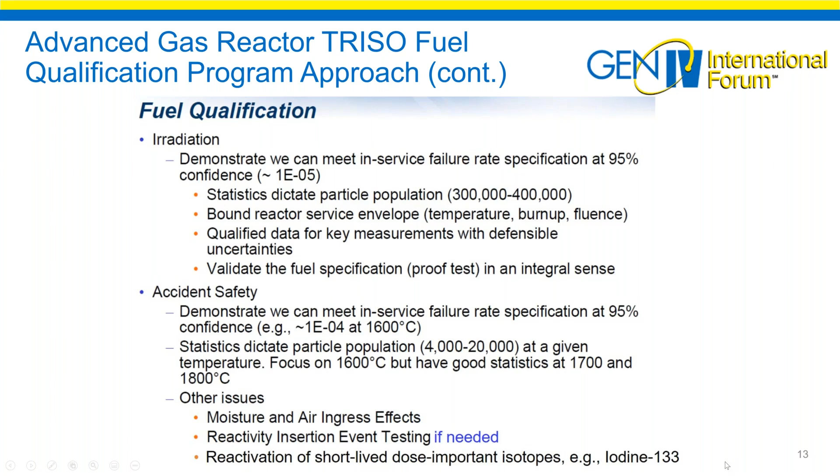Is interested in what the dose would be to the public. Let's look at the parts of our program. We have fuel fabrication, we irradiate the compacts, and then we do post-irradiation examination, or PIE, and then safety testing. Along with that, we have to look at the fission product source term, and how fission products are transported in the particle through the compact and the block. And we want to have modeling techniques.

I want to mention how this fuel is made. We take acid deficient uranyl nitrate and we basically do the mixture. We make it as a stoichiometric uranium oxycarbide, and we use a solution gel method, internal gelation. And what we do is we have a gelation column that has NH2OH basically in the column, and we use a needle and we make very small, tiny particles of, basically jellies of fuel.

We let them age in the column. We wash them with the same NH2OH. We dry, we calcine them, we reduce them, and then we sinter them. And of course, we look at what we have. We coat them in a chemical vapor deposition reactor. And we basically go through, we compact them, and then we sinter in a furnace again.

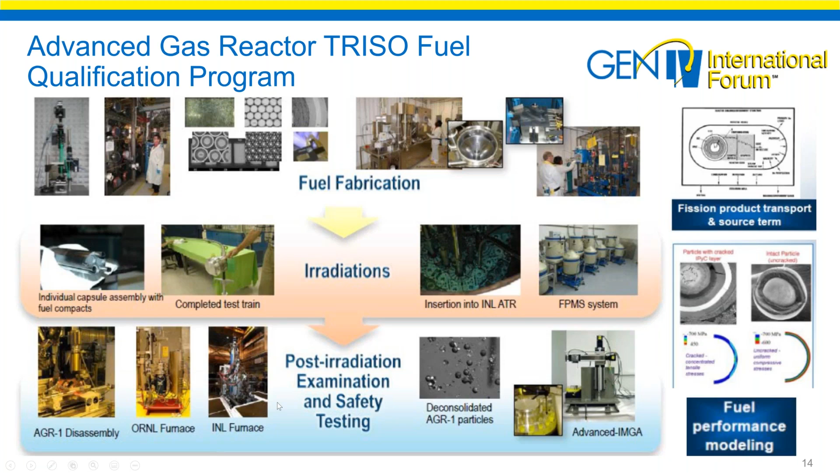Here's a timeline of our program. We started back in fiscal year 2004. AGR-1 was an early test of lab scale performance. It was meant as a shakedown of the capsule design. Now, we have 72 compacts in there. We didn't just have all the same thing. We had the German-like fuel, and then we actually made 3 variants, and we tested 2 of them. We used one coating with argon and the other at slightly different parameters with helium as a diluent.

Then in AGR-2, we had particles made at BWXT, and then we compacted them at Oak Ridge. And we have UO2 and UCO, and there were also French and South African particles in separate capsules.

We also made design-to-fail fuel in AGR-3/4, and that was used to look at fission product retention and how fission products moved in the graphite and the matrix. And we are currently irradiating what's known as AGR-5/6/7, where we have a qualification test of fuel totally made at BWXT.

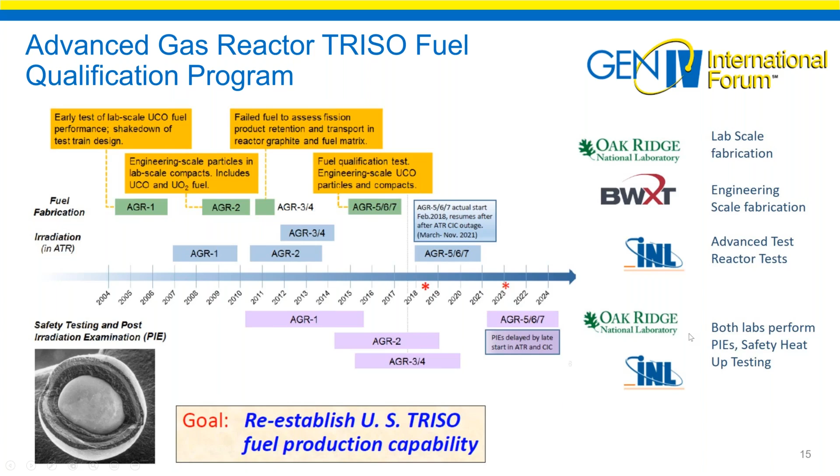Along the side here, you'll see that we have Oak Ridge and BWXT fabricating the fuel. All the fuel tests are done in Idaho. And then both labs perform the PIEs and the safety and heat-up testing. And again, the whole idea is to establish US fuel capability.

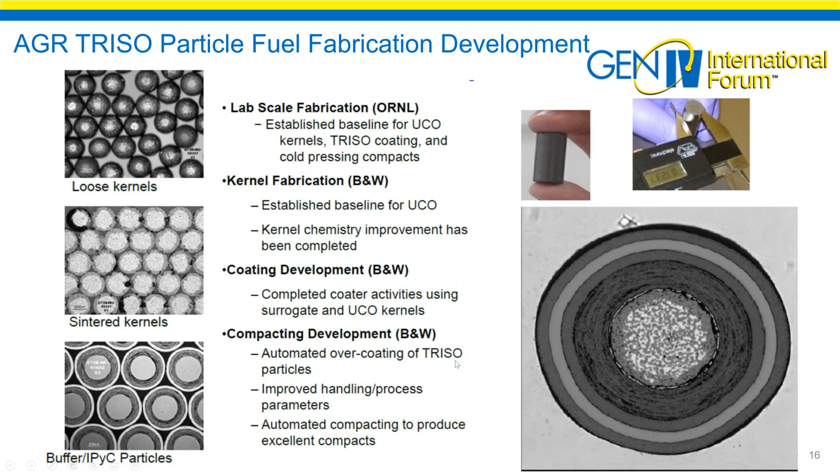This just reiterates what I've said here and shows some pictures of loose kernels and sintered kernels and how they look before and after irradiation. And again, we systematically, scientifically went from a lab scale to a totally developed industrial pilot scale. You will note that BWXT had qualification studies, and we finished those in 2012.

We have a completely automated compacting machine, and we can, with just a single compacting machine, make 5 to 10 compacts per minute. Now, obviously, we would have thousands and thousands of these in a graphite prismatic block design. And if you were making pebbles, you'd have to make more than 5 or 10 per minute. But the idea was to demonstrate that we could do it. And they actually made our specimens for AGR-5/6/7 and completed them in 2016.

So this just shows some of the commercial industrial scale, and the overcoating and drying was also automated, as well as our hot press automation machine. And then at the end, we use a sequential process without having to heat up and cool down the particles. So this way we have made better particles and compacts.

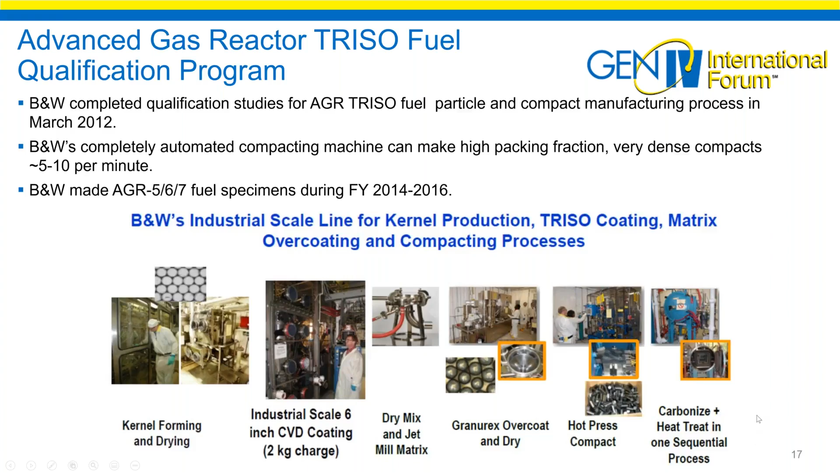Again, AGR-1 was a shakedown. AGR-2 was a performance test of our fuel that was made and coated at BWXT, and we overcoated and compacted it at Oak Ridge. AGR-3/4 is fission product transport, and 5/6 is the performance margin tests. And I'll explain that a little bit more next.

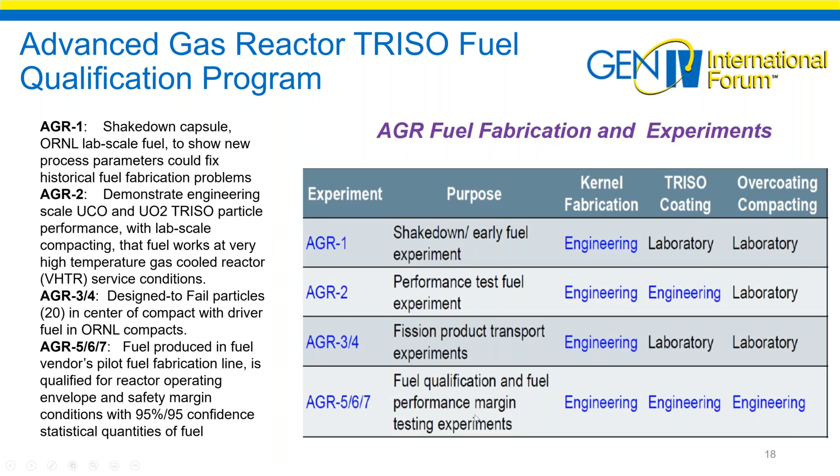Our targeted fuel performance envelope, as I mentioned, for our program has to be larger than what was historically done for the German pebble bed designs. The Japanese have a block design. It's a little different. They have an annular fuel, and our NGNP fits within this envelope.

And the idea here is that by having a more rigorous, more aggressive envelope, we can look at whether there are any cliffs out here. In other words, if we go too high in our packing fraction, or we exceed burnup and then something happens, because our Nuclear Regulatory Commission is always interested in the cliffs. So we bound what we're doing for the anticipated high temperature gas reactor designs that are being developed now.

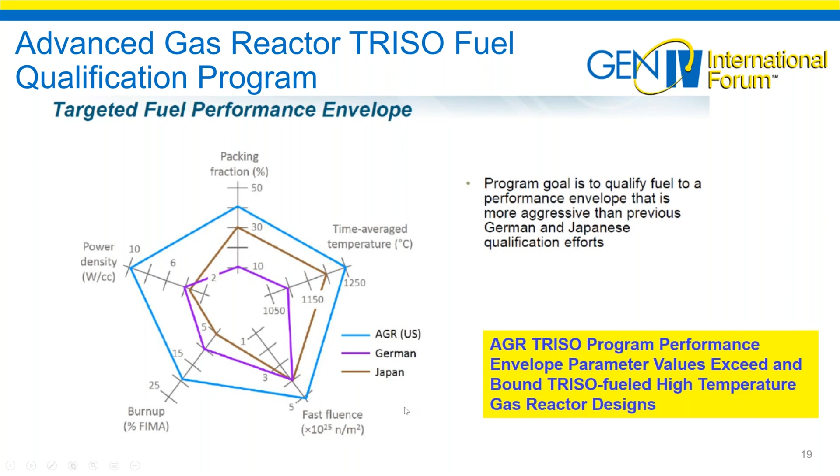Now, AGR-2 and AGR-1 are completed, and I wanted to show you some information that we recently presented to the NRC, and it's available in a recent licensing topical that we submitted this year to the NRC, and they are reviewing it now. I'm going to focus on 2 of the capsules in AGR-2, capsule 5 and 6, and AGR-1, and then AGR-2 capsule 2 had the higher temperature.

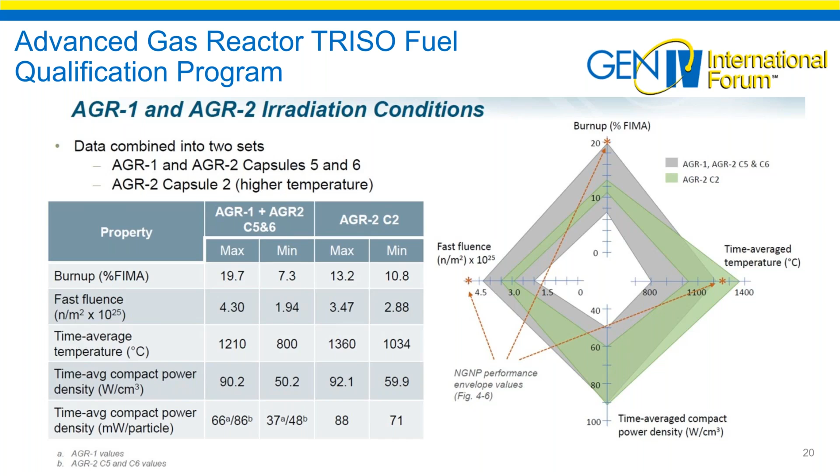Why do we use a time average value for the temperatures? Well, the population of the fuel is at different temperatures, and temperatures will decrease as we burn up the fuel. And you'll see this sort of represents what the fuel temperatures are for a certain number of particles. We actually track each compact and the set of particles here. We actually do this type of analysis to this level of detail.

So about 10% of the AGR-1 fuel experienced temperatures at about 1300 C for the first 100 to 200 days. And then it drops off. Okay, so you can see that we have some particles that are high. Now, why would that be necessary? Because in an actual

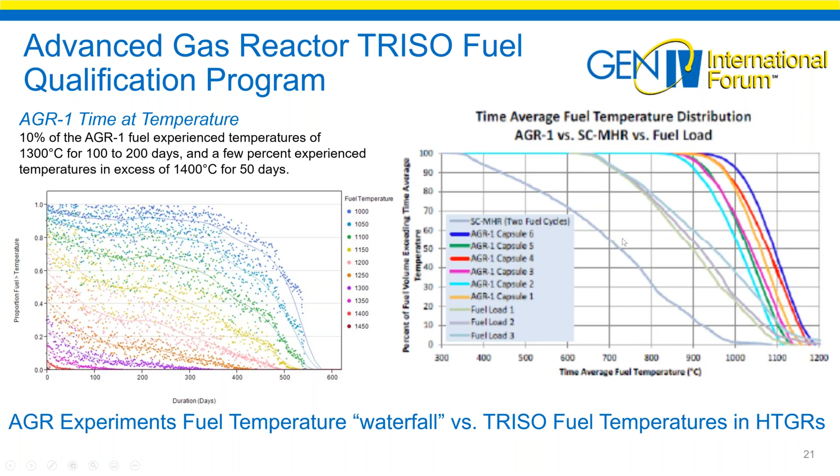SC-MHR, for instance, we have different fuel loads going through temperatures, and as we go from one cycle to the next, we're going to have reduced temperature because the enrichment is basically being reduced as we burn up the fuel. And you'll notice that our capsules envelope this range, and that was the whole idea.

AGR-2 had 4 capsules with our UCO and UO2 particles, and we had UO2 from France, where they made their own compacts, and South African UO2 particles that were compacted at Oak Ridge. We finished that test. We began the PIEs in 2014 and we're almost finished.

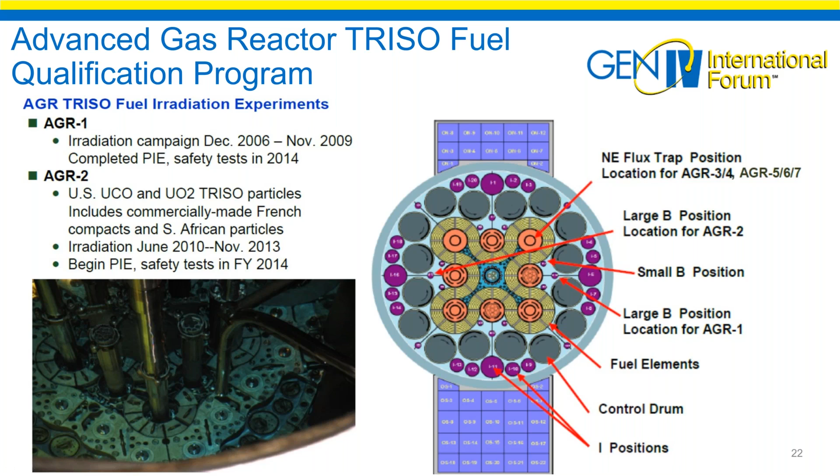We moved to the northeast flux trap for AGR 5, 6, and 7, and before for AGR 3, 4. This flux trap is about, excuse the units, 5 inches across, and we basically have our capsules about 4.5 inches across. So we could get a lot more compacts done, and that's why we combined our tests. If you look at our program plan, you'll see that we wanted to accelerate and get things done sooner.

It's important to note the success of AGR-1: we had 0 particle failures out of about 300,000 during the experiment. We pushed the burnup to about 20%. So we beat the German record by a factor of 2. And AGR-2, we had maybe 0 or 1 exposed particle at the beginning of the irradiation. These are defects from fabrication. And there could be a possibility of a few particles failing during the irradiation.

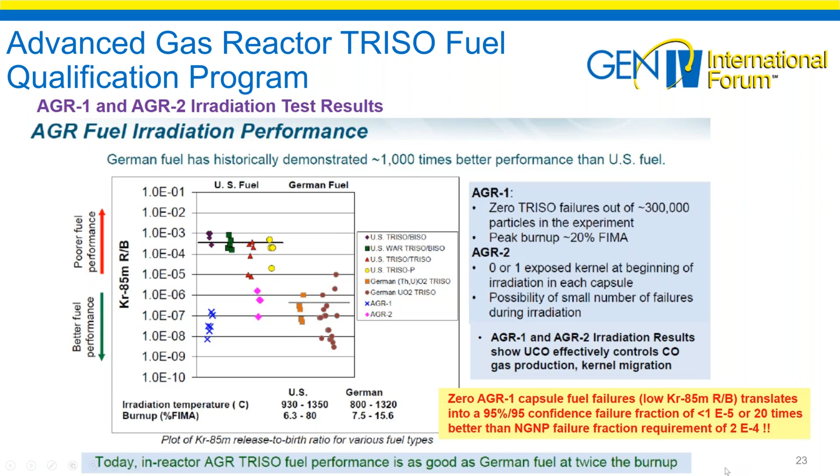What's important here is that AGR-1 and 2 showed conclusively that UCO can effectively control the carbon monoxide gas production inside the particle and prevent kernel migration, which are the concerns about using UO2 fuel to high burnups and high temperatures. What does this mean? Our AGR-1 capsule fuel failures translate into a 95% confidence failure at less than 1e-5, or 20 times better than the NGNP, our reference gas-cooled reactor design, requirement at 2e-4. Today, we can make fuel that performs as good as the German fuel at twice the burnup.

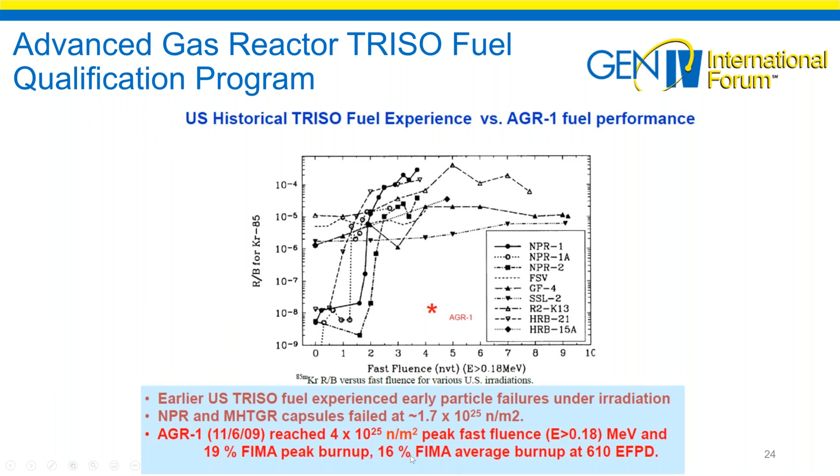It's not good enough just to irradiate the fuel and say, you didn't emit any fission products. You got to look at what's happening. So in our PIEs, we use photographs and safety testing, advanced SEM and TEM, chemical analyses. We gamma scan not only our compacts and the test train, we also look for the needle in the haystack. Each compact had about 3,000 particles, and to find the ones that could have failed, we have to basically deconsolidate and search for them. We've developed different methods to do this.

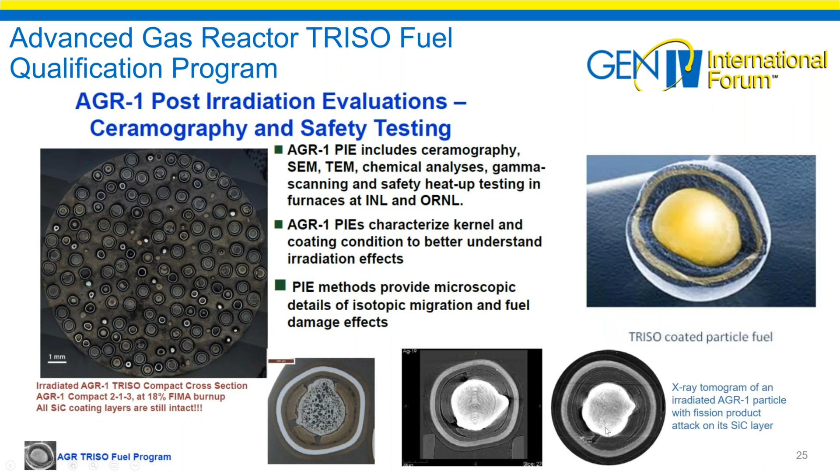AGR-3/4, again, was the fission product transport test. Now, what was unique to this is we had to make designed-to-fail particles. We had to make fuel that had thin layers, missing buffers or small buffers, and we carefully took 20 of these particles where we intentionally didn't make them right and put them in the very center of the compact.

Why would you put it in the very center? Well, the NRC said, well, if you don't know where you put them, then you don't know the distance, how far a fission product went. So you don't know anything about the diffusion of the fission products.

Well, our folks at Oak Ridge were very clever. They used basically a very thin straw, and carefully packed the 20 particles with a little bit of matrix, and they just put it up through the metal, and then they removed it with the other particles around it and compacted it, and then they did radiographs. So we know where the particles are in these designed-to-fail particles.

We have irradiated them in the northeast flux trap, as I've said, and this flux trap is very unique. It has a nice thermal flux that represents what would happen in a gas-cooled reactor. It's prime real estate for us, and we've been glad to be able to use it.

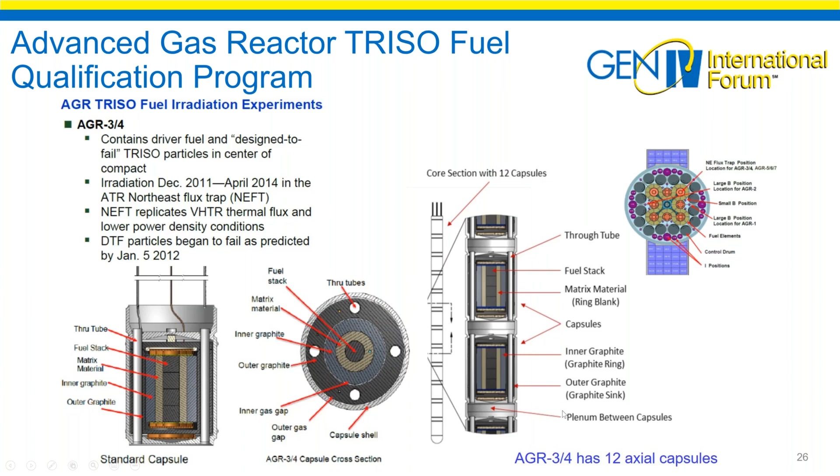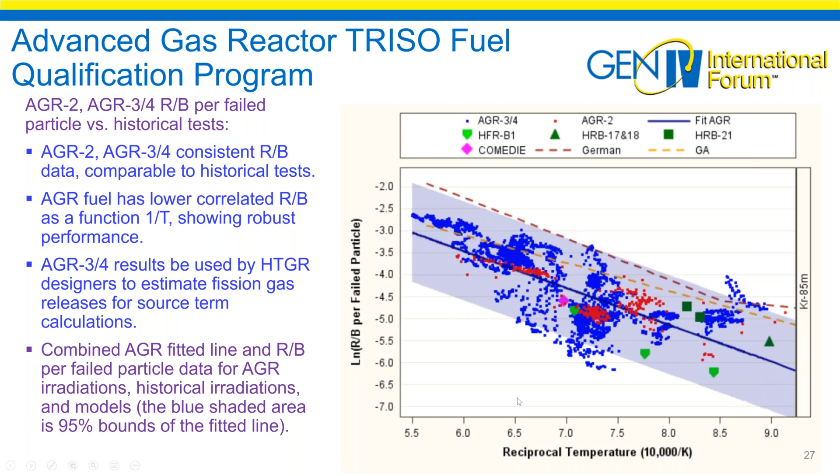AGR 5, 6, and 7 is currently in the Advanced Test Reactor today. And again, we have 5 capsules. Capsule 3 is our margin test, our AGR 7, where we have very high temperature fuel. The peak temperature is at 1500 C. We have compact average temperatures in 5 and 6 in the other capsules between 600 and 1400 C to bound what would happen in a gas-cooled reactor. We're seeking 6 to 18% burnup, and we have 194 compacts. So it's over 500,000 particles to get good statistics.

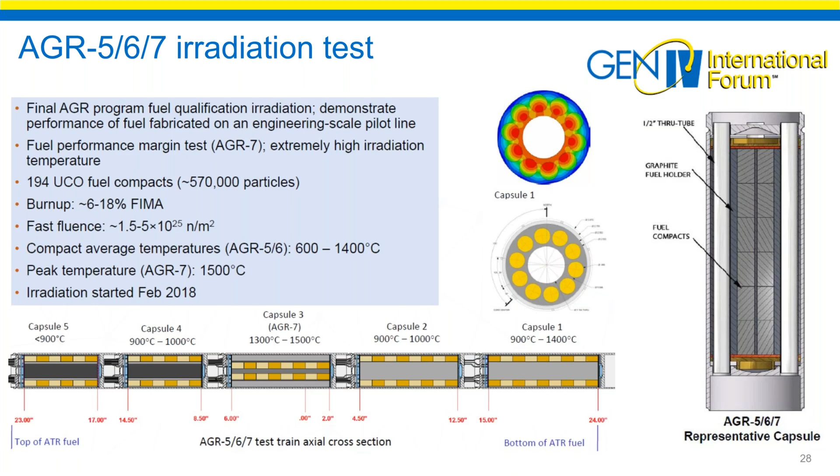Now I'm going to just show you that AGR 7, this capsule 3 here, we have fuel compacts here. We have to have a through tube for the instrumentation from the other compacts below. And the question you might ask, well, why does the temperature sort of change along here? Well, the flux in the Advanced Test Reactor would peak in the middle, of course, with a chopped cosine. And the top of the core is where the coolant comes in and it flows downward in the reactor. There's a lot of thermal analysis and neutronics analysis to determine what is happening in each one of these.

Now, high temperature safety testing of the fuel is important because we want to see that irradiated fuel will perform well in the peak accident. I mentioned this total loss of forced circulation, this DLOF-C event. And the maximum core temperature just skirts a little bit above 1600 degrees Celsius. The average is a little lower. But you'll notice this is in hours. So it takes hours or basically days to reach this temperature. So the operators wouldn't just walk away, but it's passively designed. And it's not even close to the rapid temperatures that you would see in a light water reactor event.

So the fuel particles have to be designed to withstand accident conditions and retain the safety-significant fission products. So we're going to assess these by doing dedicated testing in furnaces between 1600 and 1800 C. We basically have 2 sets of furnaces to do this in. And I just have one representative compact here. It's a 1600 C test.

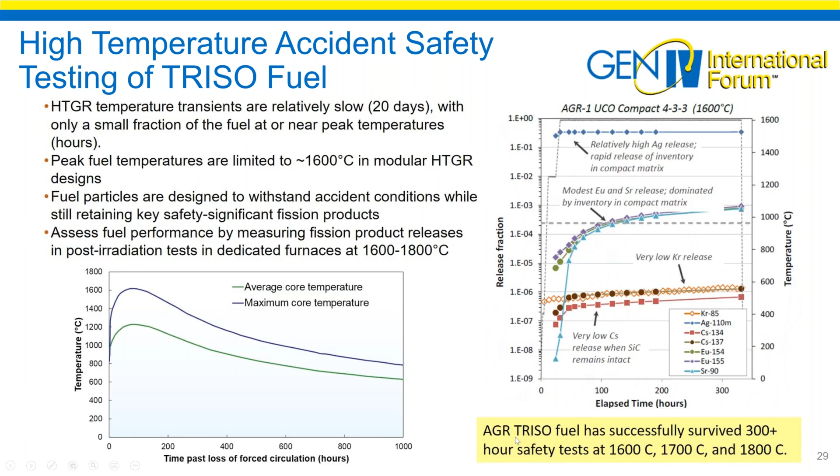We're going to notice in this graph that we have AGR-2 results and single particle failures for UO2 and UCO. Now this looks like a big mess here, but what I want to point out is these three lines here are the UO2 fuel, and they definitely had more than one particle released. It wasn't as robust. There were no UCO particles failed in AGR-2 and AGR-1. No AGR-1 particles were seen to be failed in our safety test between 1600 and 1700 C.

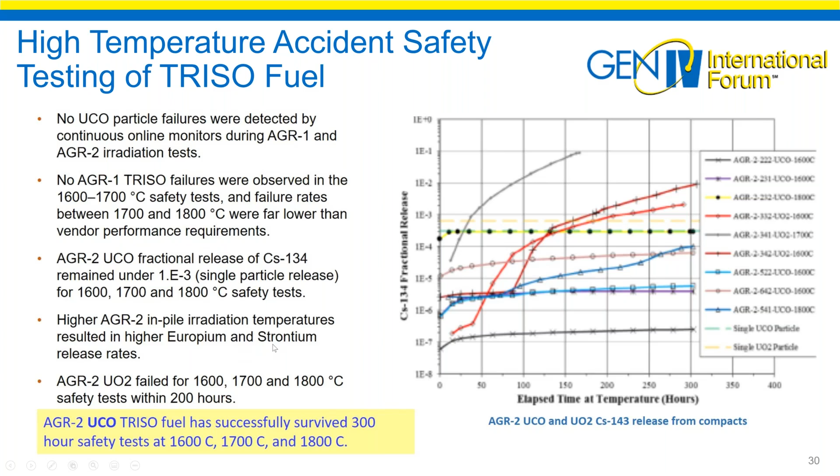So there's margin there. And there were a few failures when we pushed the temperatures up to 1800 C, but it was much lower than what the reactor vendor would need for the performance requirement during the accident. Remember that we needed to have that 10 to the minus 4. Our fractional release of cesium remained under 10 to the minus 3 for single particle releases in our safety test. We did see some europium and higher strontium releases, but the UO2 fuel failed at the temperatures easily within 200 hours. So the UCO fuel was successfully tested. UO2 fuel would fail. Where are we today?

We've basically completed our safety tests. Our PIEs and safety tests will be finished this year. We're going to complete the AGR-3-4 PIEs by 2022. We will have our irradiation finished in the ATR either by 2021, before the core change-out internals, or one cycle after that.

Then we will do safety tests and heat-up testing, and that will be done up until 2024. We will actually do safety tests in oxidizing atmospheres, the air and moisture test. We committed to our Nuclear Regulatory Commission to do that. We felt it was better that we would do it rather than trying to have them do their own tests. We'd rather use the experimental specimens we already irradiated, so we knew what would be happening, and we had enough compacts irradiated to have the statistics available to see what was happening.

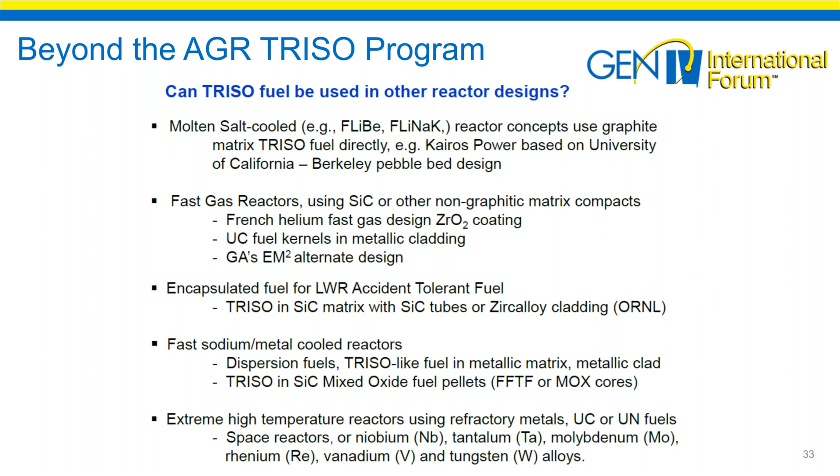TRISO fuel has also been looked at for fast sodium metal-cooled reactors in a dispersion-like form, and TRISO fuel in a mixed oxide pellet. There are some ideas for using refractory metals, UC and UN fuels for space reactor designs. We have NASA using some of our particles for their testing. And Department of Defense is also looking at this.

There are designs out there that will use TRISO fuel. X-Energy has their Xe-100 reactor. They have their TRISO-X facility fabrication. They are being funded in various DOE programs right now. They have a separate agreement also with Oak Ridge under a CRADA, which is an agreement to work with the laboratories, at 11 million. They are now collaborating with Global Nuclear Fuel for the DoD microreactor.

The Defense Department wants a microreactor. They started their funding announcement asking for TRISO-based fuels. So we'll see. And NASA wants to use TRISO fuel possibly, or basically a coated particle for space exploration. X-Energy is collaborating with Centrus for their facility design.

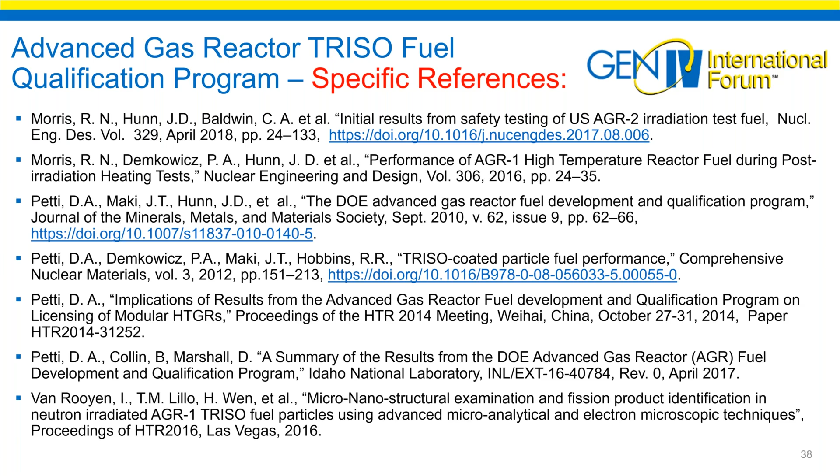I also have included Dr. Isabella Van Rooyen and her team's examination techniques to explain how we've done this. It's wonderful, we have tried all sorts of methods to do PIEs and look at silver. The neat thing is that we have tools now that previous TRISO fuel irradiation results could not see these things. Now we have high resolution TEM and focused ion beam methods, and we can see things on the nanoscale.

I just picked some of these, so we can go from big pizza pie down to nanometers, and the backup slides also show some of that. We're very proud that we can look at micrographs. So with that, I would like to see if we have any questions. I really thank you for your attention and interest in TRISO fuel.

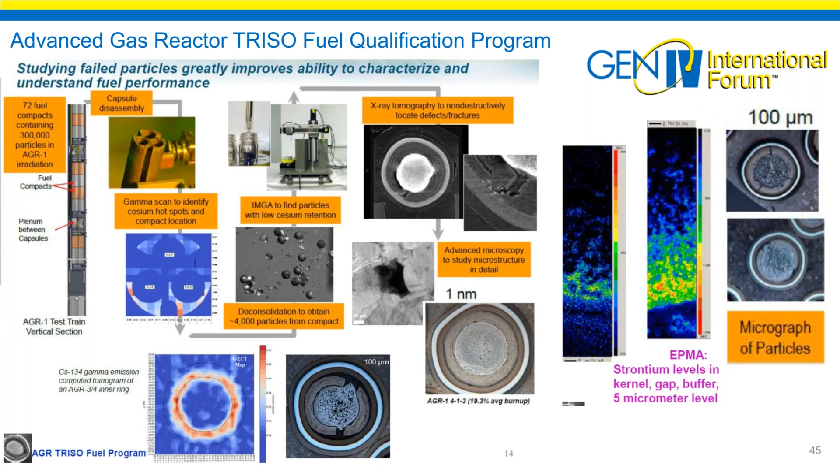Oops, can you go back for me? I only can go in one direction. Can you go back one for me? Sure. All right, there we go.

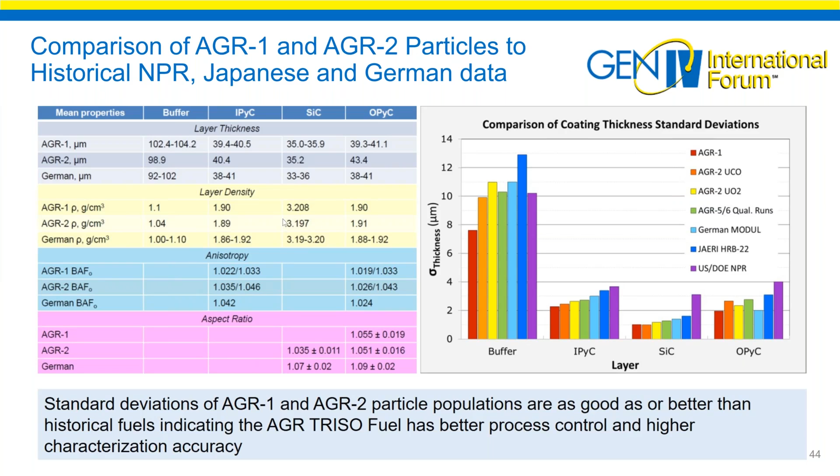Yes, thank you for that question. I love it. If you look in the IAEA textbook there, I mentioned the Tech Doc, there are descriptions of what has had to be looked at for making matrix material, and the characteristics of the matrix. And you will actually see there's information about the contamination levels.

It becomes important, for instance, there's only so many sources of graphite available. SGL makes some, GrafTech makes some, and so you don't want to have to clean up the graphite, but you have to know what's in there. And there are carbon composite materials properties. There's some information about the characteristics of what you need to have in the matrix material.

Each graphite is very unique, and in the advanced reactor technology research, we have a graphite irradiation program specifically that was part of NGNP and now continues, and they have characterized the graphite. I would suggest that you talk with Dr. Timothy Burchell at Oak Ridge National Laboratory, and he can give you a ton of information about the graphites, and more importantly, refer you to the specific IAEA tech docs that describe what they've been seeing.

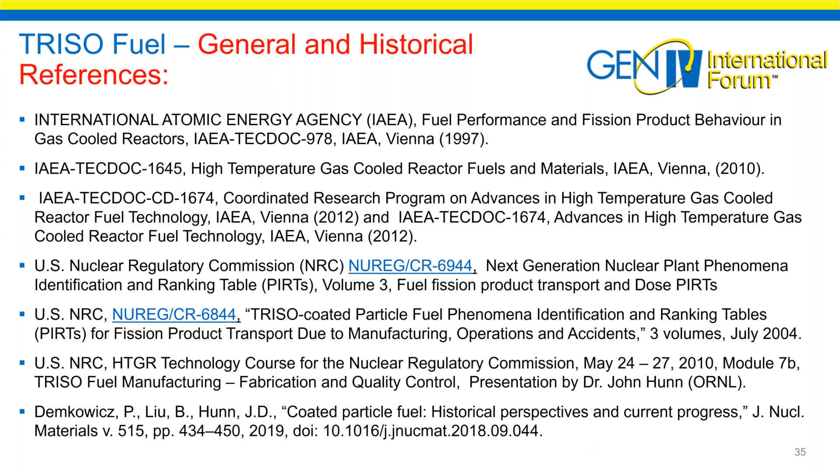All right, bingo. This is called stacking the deck with the NRC. The NRC asks the same question: how are you going to do the quality control and the statistics? How are you going to do it? Well, the NRC needs to know how to do this. So you'll see the third bullet there. Dr. Hunn, Dr. Morris wrote basically the book on how you do this quality control for fabrication.

And we produced this in May 2010. So this is an Oak Ridge document that is a contractor's report, so it's a NUREG/CR out there. And what you do is you have to have statistics so you meet the 90-95%.

So that means that, for instance, as you coat the fuel, you're going to have to take samples from the coater while it's running. It's automatic now, but you don't want to stop the coating process, let the particles drop, unload the coater, take some out, and then put it all back in. You want to do this continuously. So this is part of what we did at Oak Ridge and BWXT, to have a method to take out samples as you go along.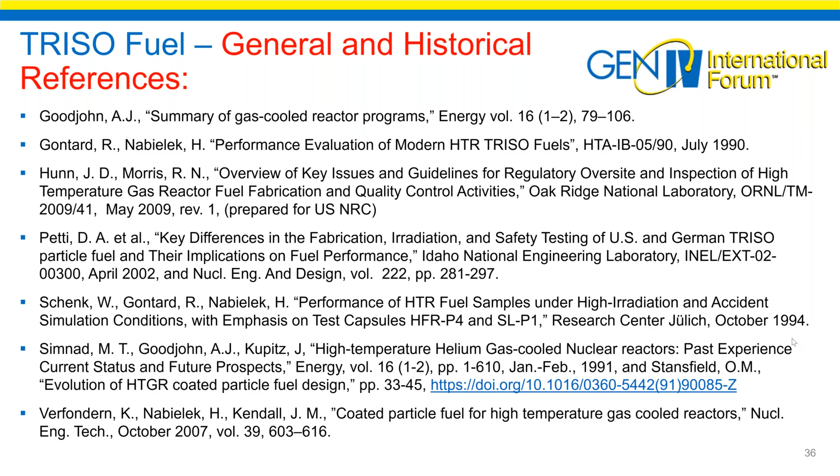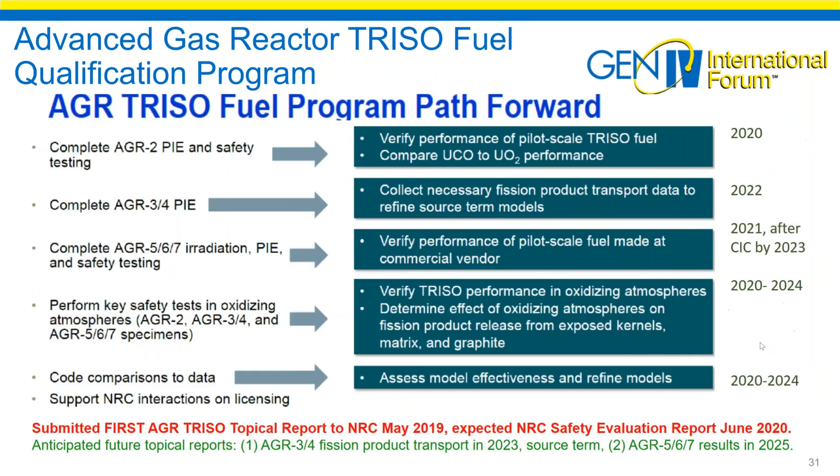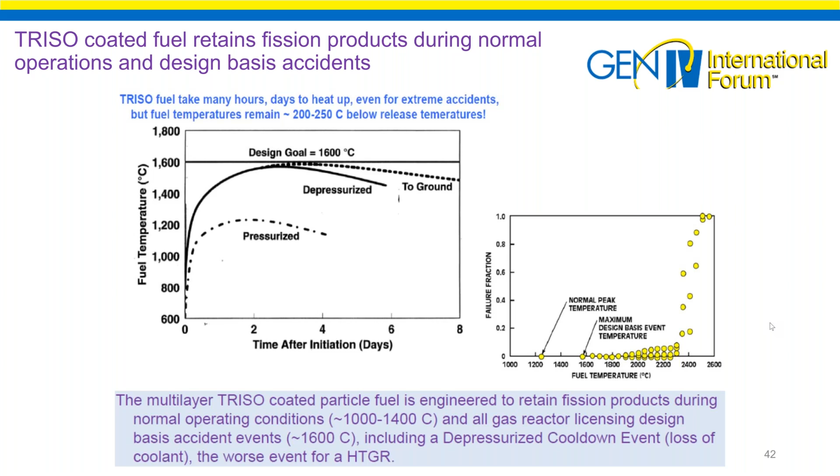Thank you for a wonderfully informative summary. What are the main failure modes of the modern UCO kernel design? Failure modes, okay. One of the slides I have is on UCO versus UO2 fuel. Do you know the number? Or you can scroll too. It's right before the one where I had the histogram. So it's backup slide number 2, I think. Yeah, I didn't print these out with the numbers. Next one. There we go. All right.

We've published this with the AGR-1 data and the PIE analysis. Most of the failures, or things where we saw interesting things going into the kernel, were buffers cracking. And the issue here is if the buffer adheres to the inner pyrolytic carbon as you irradiate, then cracks may form. And as we saw with some of the tomographs, the kernels will bulge out.

And if that cracked buffer has fission products that go right against the inner pyrolytic carbon layer, that is usually one type of failure. The other type of failure that we've seen, and they actually don't fail, is the buffer tears away mostly uniformly. Okay.

Again, I would refer you to the one reference that has the AGR PIE experience; it's one of the references that I've given you. Dr. Petti and the whole crew put that together, where we identified 6 or 7 different ways it can fail, and the actual number of particles that we saw this in as a representation of a whole amount.

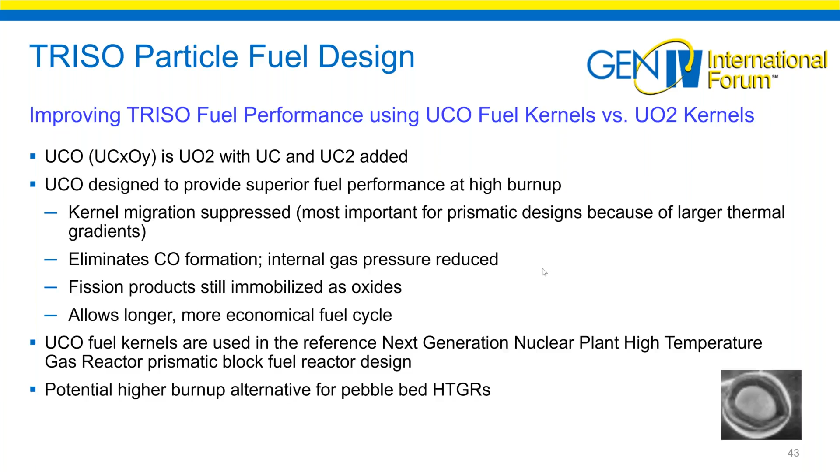So it's on the first specific slide. It's number 3, and you'll see the key results from that. It's in Nuclear Engineering and Design, and I gave you the DOI reference. And inside of that, you'll see the actual complete PIE AGR-1 document that came from Idaho. So that gives you the big results, and then it refers to the glorious details of the AGR-1 UCO. See, I'm close, folks.

I have a photographic memory, so I can sit here and say, oh yeah, it's A, B and all this in a particular diagram, but you can't read my mind and you don't see my gestures, so maybe that's good.

Okay. Can we treat the maximum temperature 1600 degrees C as the safety limit, similar to 1204 degrees C for LWRs? Yes. Yes, you could. That's where you have to have it perform, and that temperature was based on the prismatic block design for NGNP, and the block designs is a little bit lower in the German tests.

The important part of that is if you want to look at this, there's a chapter 12 in the TECDOC 1674 that has regulatory perspectives on HTGR fuel quality and safety. It was written by Stu Rubin as part of our work together as a big team. I didn't write that document; a big team wrote that document. And basically, we went through and looked at the different designs, HTR-10 and our tests, and the GT-MHR results.

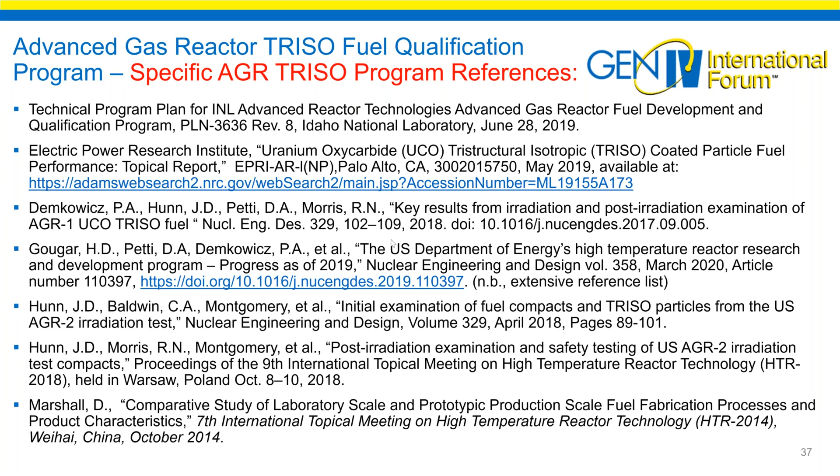Unless you want to burn plutonium, like the Russians were looking at this for weapons grade plutonium. And again, there is a design worked with Russia and the General Atomics folks to use separated plutonium to burn the hell out of plutonium particles - get turn the weapons into plowshares, and that was the whole idea.

Again, there is a limit on how much plutonium you really want to use in a core. Proliferation, deployment of reactors is very closely watched all over the world, and I can't say what a country that's not compliant with proliferation requirements would do, but I don't think they would go beyond 20% anyway. It's not efficient for a thermal gas reactor.

Dr. Feltus, I can't thank you enough for your enthusiasm and passion. It really comes through when you do your presentation. We've been on for 2 hours. My goodness, this has to be a record for the number of questions and the level of interest that we've had on these presentations. I tried to keep my slides within the 50-some minutes, and we tried that. You tried it out, and I'm really amazed at folks' patience and duration of time, and I really appreciate it to answer questions.